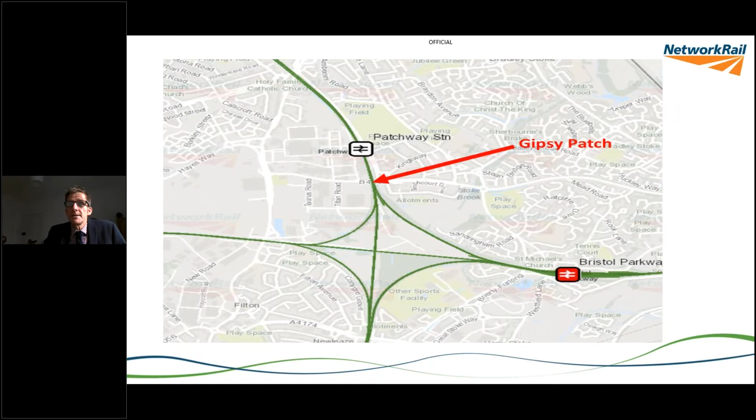So as I said in that earlier slide, this was made more complex because of what was actually on the structure as well. So the summary - if you read this it made me chuckle the other day.

I did make this slide myself. This made me chuckle because what it says is Gipsy Patch Lane in Little Stoke will be closed for almost 2 years for the removal of a railway bridge. Well, the important part was actually we were putting one back as well, because if we just removed it, obviously it might help the locals. And those of you who know this location will know that it is a little bit of a rat run for people who like taking shortcuts around Bristol.

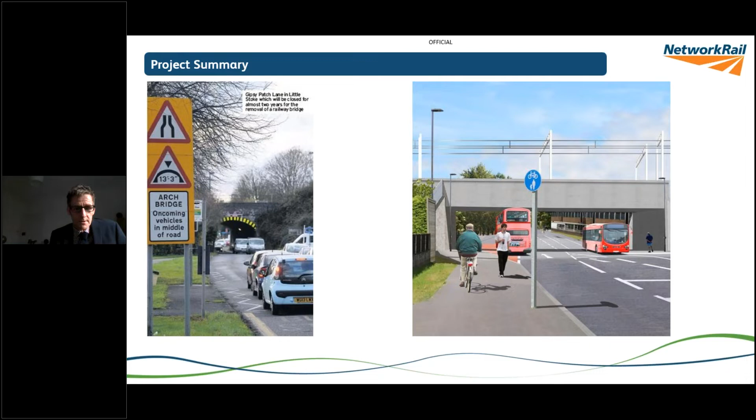But equally, it gets very, very congested, and that is the structure in the background you can see there that was being replaced. And this is an artist's impression of what you've kind of now nearly got. It's not quite there yet in terms of being fully open, but this is an artist's impression of what was going to be there in the future.

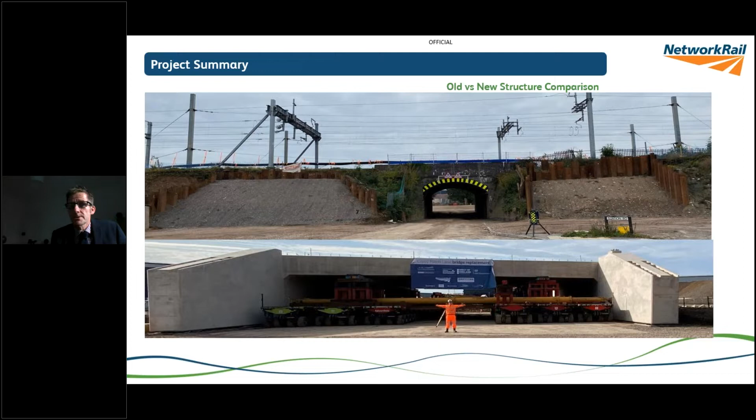And then that there is a picture to kind of put it into scale. Those two pictures have been scaled to size, and the one at the top is what was coming out, and the one at the bottom is what was going to be put in. And what you can see underneath the structure there, and I'll refer to these a fair bit through the presentation, is the SPMTs, which were the transporters that lift the bridge from its build location into its final location, which I can touch upon on this slide here.

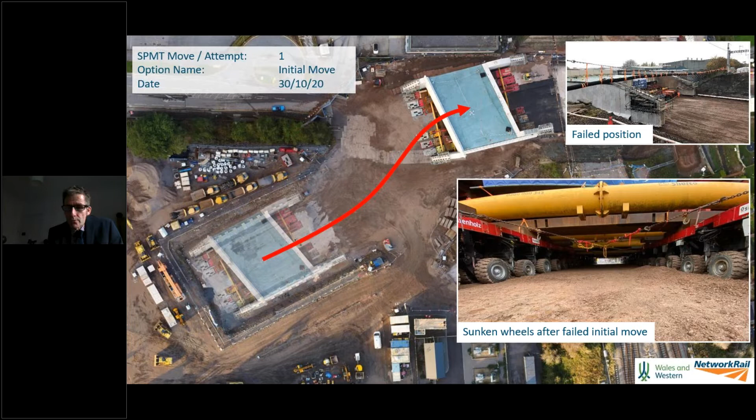As I said in the previous slide, the bridge had failed - it had sunk in the ground conditions. A short while before this bridge was moved, that whole area was underwater, and you can see some water there anyway, because the weather in November wasn't very pleasant. But a short while before this, the whole area was almost underwater as well.

It's probably one of the reasons why we ended up with the problems we did, because the ground water levels there proved to be problematic as the team were trying to move the structure. So there were many attempts.

I won't go through a lot of detail on this, but there were many attempts to move the structure. There were alternative methods which proved unsuccessful, like putting things underneath the wheels of the SPMTs to see if that would get the momentum going with the SPMT vehicles, but many failed attempts.

This was delaying the handback of the track, which was the ultimate target, because we couldn't hand back the track with the structure out of position - the track, OLE and signalling needed to be put back on the structure once it was in position. So there were many failed attempts to move the structure, but eventually the bridge did get moved into position.

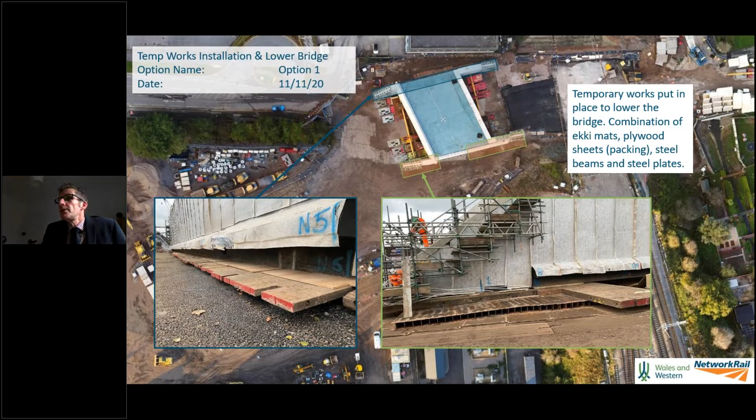Now, one of the issues around the structure was that, as you can see in the photograph on the left-hand side at the bottom of the slide, there was quite a significant issue with the buried services that were in the roadway, and that was a key factor in terms of how the roadway could be built and how those cables needed to be protected.

These weren't necessarily cables serving the railway - these were cables serving the industrial estate that this site sits within, including some quite key companies like Rolls-Royce, which we couldn't afford to damage. So there was a key piece of work in making sure those cables were protected when this structure was effectively driven over the top of them.

As you can imagine, the temporary works that were being suggested as temporary measures, shown in the previous slide, had to be really carefully designed over those cables, which is what you can see in some of these photographs.

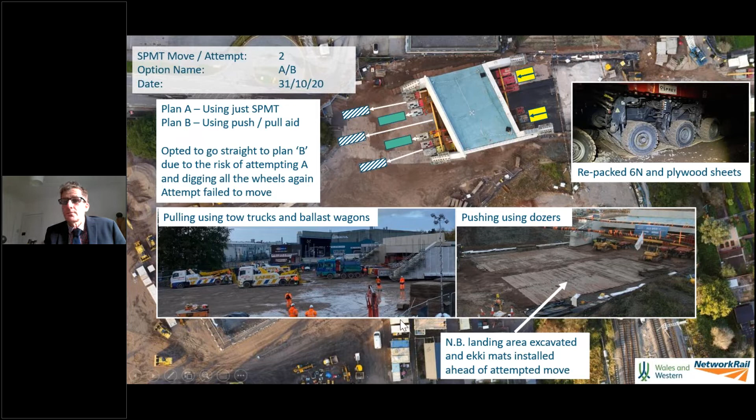So I'm going to move on from that. Eventually we had to get to a point where the structure was driven into position, and eventually got there by actually doing what should have been done in the design.

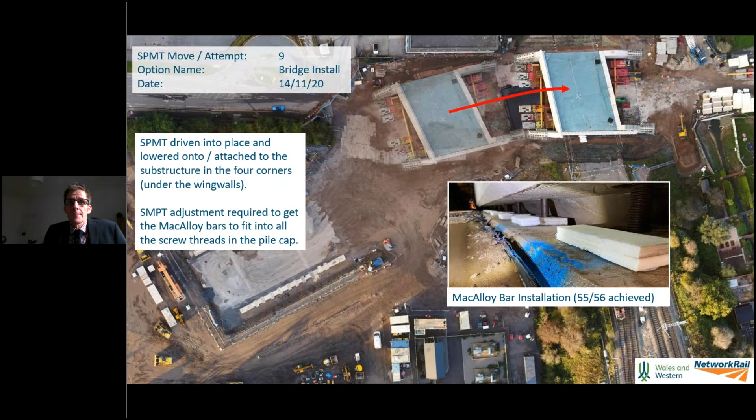So the key thing about the design and the roadway was that the design suggested there should be a tarmac roadway built, such that the SPMTs could drive over it. What you'll see through the next few slides is that tarmac roadway wasn't installed - a decision was taken not to install it, and it had a major detrimental impact on the program, which we'll come to.

So there was an investigation into the fact that this job overran by a few weeks, and there was a remit for the investigation. It was broken into 4 parts - one part was the development and design structures.

There was a small team of people set up to investigate whether we'd actually got the development design right. There was another team of people set up, of which some are on this call now, to talk about the management of the construction on site.

Another team was brought in to talk about the roles and responsibilities of the Network Rail engineer and project management team on site during the works, plus people like myself who were parachuted in. We think we're helping, but there's also a view that some of us brought in were perhaps a little bit of a hindrance, and just throwing resources at the job didn't necessarily always help. There was another team brought in to look at the crisis management and how we responded and recovered.

The key findings of the investigation are that the method of construction and design selected was correct for Gipsy Patch. It wasn't a first of type; these jobs are done a lot all over the country and the world, so it was deemed the correct method. There was a lot of experience in the team from both the contractor and Network Rail, who'd done many of these jobs before, but it was the heaviest SPMT bridge move in the UK at that point in time, significantly greater than anything the team had done before.

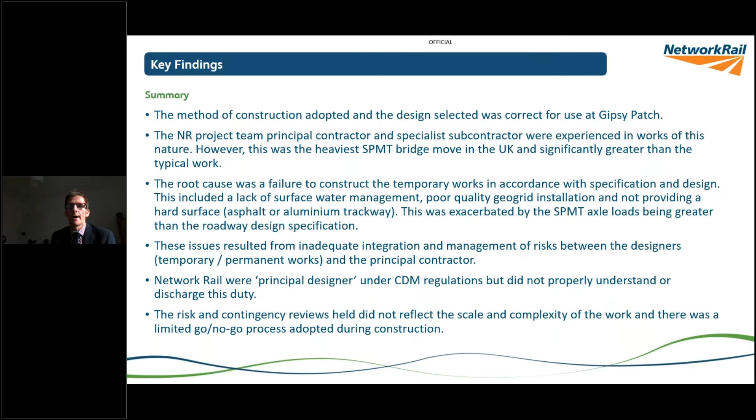That decision resulted in integration issues between designers and the management of risks between designers, because there was more than one designer, and the principal contractor on this job. Network Rail were the principal designer, and one of the findings through the investigation was that Network Rail hadn't fulfilled its duties under the CDM as principal designer, and certainly hadn't discharged all their roles and responsibilities. The risk and contingency pre-reviews, given the complexity of the job, looked quite a lot at the bridge itself, but didn't necessarily reflect how complex everything on top of the structure was, and the go/no-go process didn't really cover that.

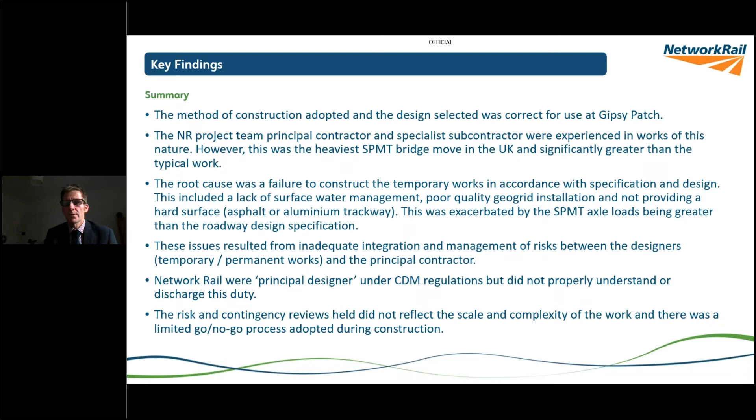So the engineering lessons learned: it was the correct single option. The fact that it was a reinforced concrete structure built on site was, as I said, the right thing to do. Lots of other options were considered, but this was the preferred single option, and the process followed for that option development was good. Yes, there were other options, but they were discounted. This slide really talks about the fact that the option selection process had been followed correctly. But the problem is the issues that caused the failure were that the design was not then followed.

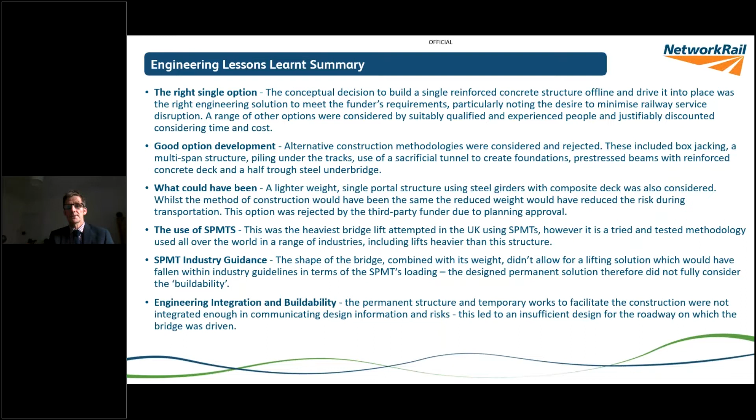I talked about SPMTs and the fact it was the heaviest bridge at that time. It was the heaviest, but it was proven technology, a proven method of working, and the industry guidance on the weight of the structure was followed, with our engineering team and design team involved in that decision. It was the right decision, and a lot of engineering integration and buildability work, particularly for the structure, had happened. But as I touched on earlier, there was definitely other work that could have been done in understanding how much more complex and detailed the work was. One thing I picked up on is how detailed the timings were for some of the tasks in the detailed plan.

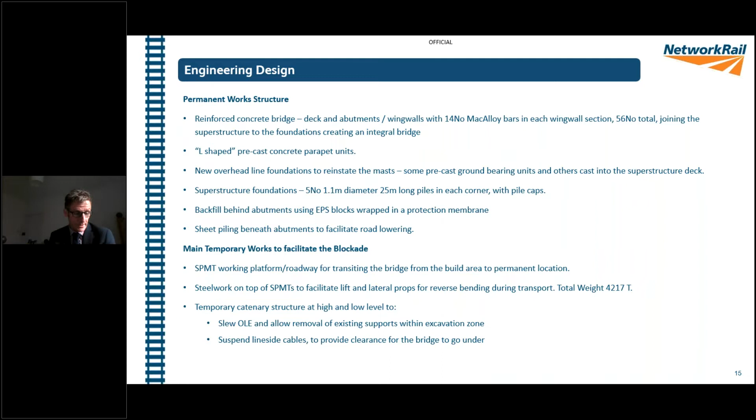I'm not going to cover everything on this slide as it'll take too long, but there were some things through the construction that, as I talked about with the complexity, may have been overlooked. The MacAlloy bars - that was almost precision technology to actually install that bridge with those MacAlloy bars. Having watched that actually being undertaken, you're talking millimeters.

This 5,000 ton structure had to be positioned within millimeters of its final position, because these MacAlloy bars were planned with absolute precision. And the L-shaped precast, I've got a photograph of these later on. It did cause us some problems.

Once the bridge structure was in place, the placement of these L-shaped parapet units caused us a few issues and delays through the extra work that had to happen on top.

The overhead line foundation caused us some concerns, and the interface with the suspended cables, which you'll see, the backfilling on top of the polystyrene blocks. That is an activity that I think should have been more meticulously planned in terms of how long each of those blocks would take, and how long the backfilling would take. Again, it needed military precision timing, because the amount of time it took to backfill certainly caused us some concern in the latter activities.

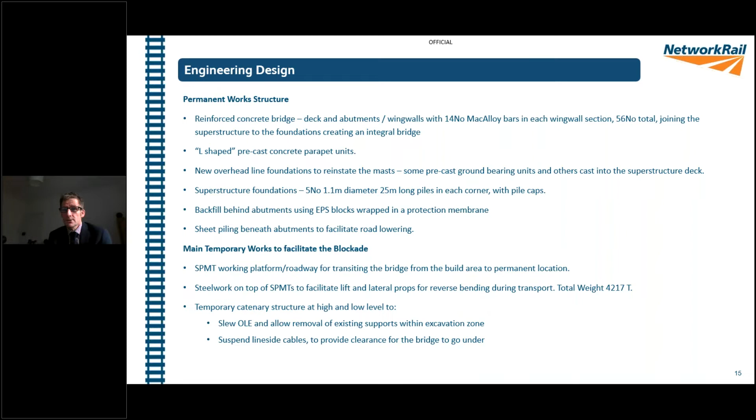Talked about the SPMTs a lot. Yes, there's probably nothing else for me to cover on that slide.

This slide, the only reason I've left it in was just to show, and I'll touch on this later, this area here is something we're going to talk about later. And this area here was backfilled to quite an extent, some with polystyrene blocks, and then the rest with motorway type fill. I'll come on to why on some later slides, a subjective topic, but I'd like to cover it because some on this call have more experience than I do in terms of positioning of P-way asset, and we'll come to one of those points later on.

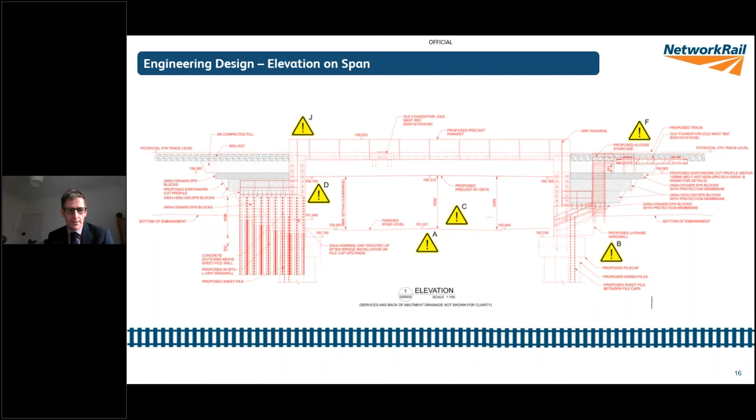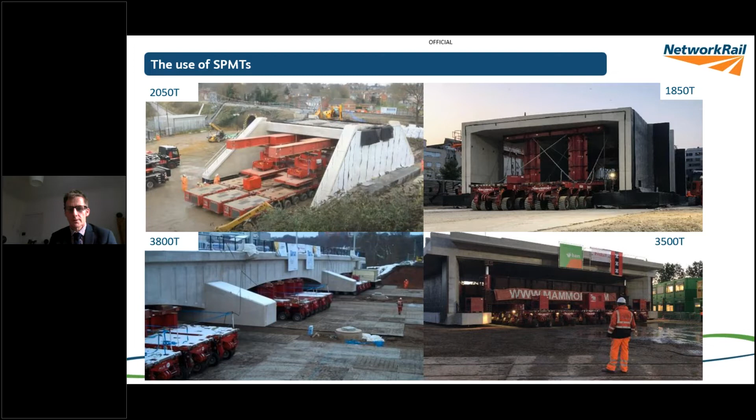So this just shows that yes, this has been done before. It wasn't a first of type. These are another company's SPMTs, but it just shows this wasn't the first of type. Some of those structures not quite as heavy as Gipsy Patch, but certainly getting up towards it, particularly that one on the bottom left, that's about 1,000 ton lighter. So it is lighter, but obviously the heavier the structure, the more SPMTs you need to move it. You can probably see they've got steel sheeting on some of that structure there, which is one of the features we'll talk about on the next slide.

And that, as I said, through the investigation that happened, was deemed to be the root cause of the issue. Now, what I said in my earlier slides, and it's probably not covered in these next slides, if this job had happened in the spring and there had been less water around, we will never know whether we would have got away with this or not.

Because if you tried to drive the SPMTs over the type 1 compacted fill that's not got a lot of water in it, we might have got away with it. Like if you try and drive your car over type 1 fill which isn't wet, we sometimes can get away with it. But if it's been raining for a couple of days and you try and drive your car over it, you might not get away with it.

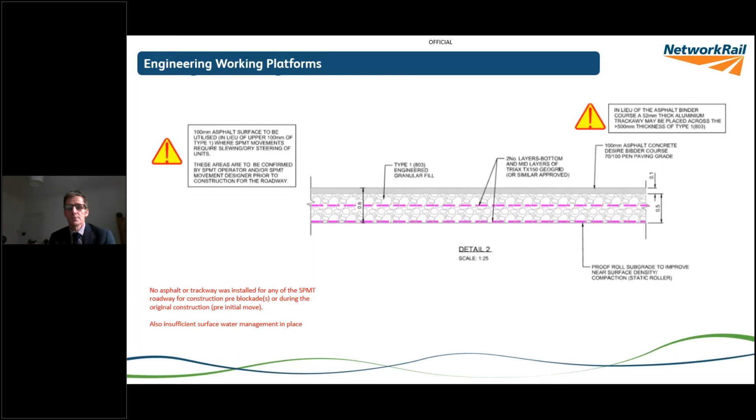So this is why I've left that slide in, just to show that that was the design.

So whilst the surface was kind of recently laid, the issue was that the material had the ingress of water, and it was having an impact on the wheels, and it was causing water to pond around the wheels.

Yeah, hence—oops, sorry, that's come onto my screen, sorry, I didn't mean for that to happen—hence it getting stuck.

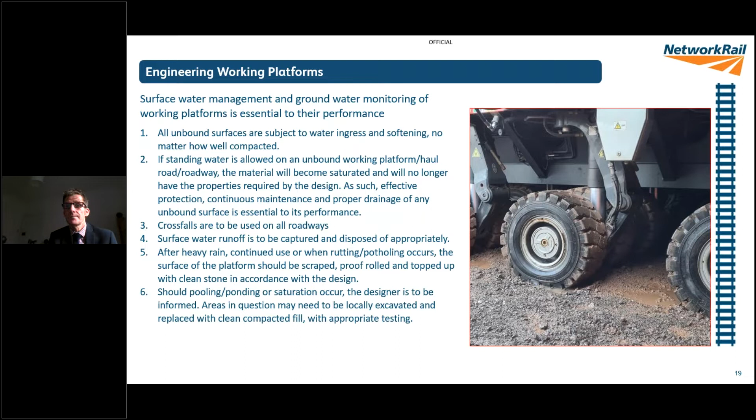So I've probably covered some of this stuff that I was going to talk about anyway. Yeah, I think I've covered everything that was in that slide.

So without any sheeting or any tarmac, you can see why. I guess you can see from that photograph anyway why it ended up getting stuck, and it ended up causing us to have a plan that was then under stress.

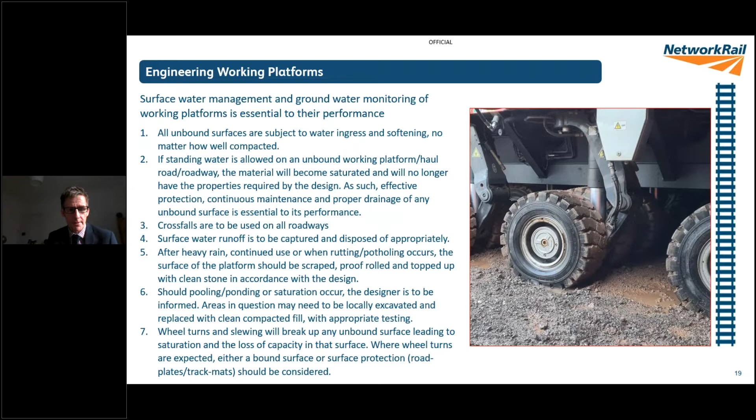But there were some issues which caused some more time delay in the setting out of those steps. So anyway, it ended up causing another load of trimming required, and whilst that was happening, we were on the critical path.

Once the structure was in position, we were absolutely on a critical path for backfilling. Then once the backfilling was complete, we were on a critical path with the installation of the bottom stone on the structure. And then for the OLE, signalling, and track work, we were absolutely on the critical path because we'd made a commitment to the operators in terms of this work going back into operation, such that our customers could then use it again.

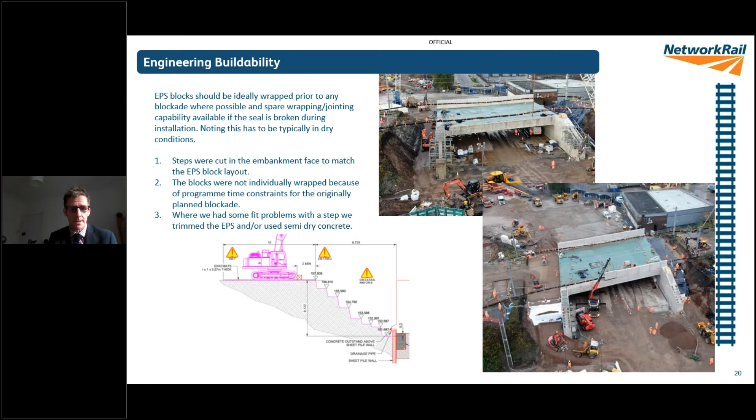I'm not going to cover all the things on this slide, other than - and you can feel free to read it when these slides are sent out - there were some decisions made, as I've talked about, which were not as per design. We talked about Network Rail not fulfilling their duties as principal designer, and we talked about the two things I've highlighted in red there.

The roadway was a potential single point of failure, and as we know, the roadway did then become that single point of failure, did end up failing, and was the one reason you could pick up as the fact that we overran by a couple of weeks.

As I've said a couple of times, we will never know if this work had happened as per the plan. If it wasn't for COVID, we might not even be talking about this on this call now, other than the positives about lifting a 5,000-ton bridge with the SPMTs and how successful it was, rather than talking about it because the job overran.

Again, through this, I'm not going to talk about this much - it's some of the detail in there I've highlighted in red. There is a suggestion that there was a commercial decision about not building the roadway, because the installation of the Type 1 fill was deemed to be acceptable, and not putting the tarmac surface on was deemed to be acceptable, but that ultimately proved to be the wrong decision.

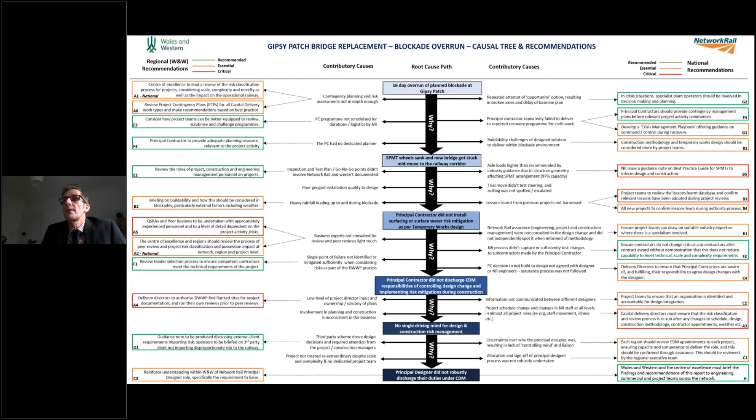So the recommendations that came out of this - now this is a very, very busy slide - but it's basically asking the five why questions. So why did we have a 16-day overrun? Because the SPMT wheels sank and the new bridge got stuck.

Why was that? Because the principal contractor did not install the surfacing or surface water mitigation as per the temporary works design. But why was that? Because the principal contractor didn't discharge their responsibilities by controlling this. Well, why was that?

Because there was no single driving mind in design and construction risk management. Why was that? Because the principal designer in Network Rail didn't robustly discharge their duties under CDM.

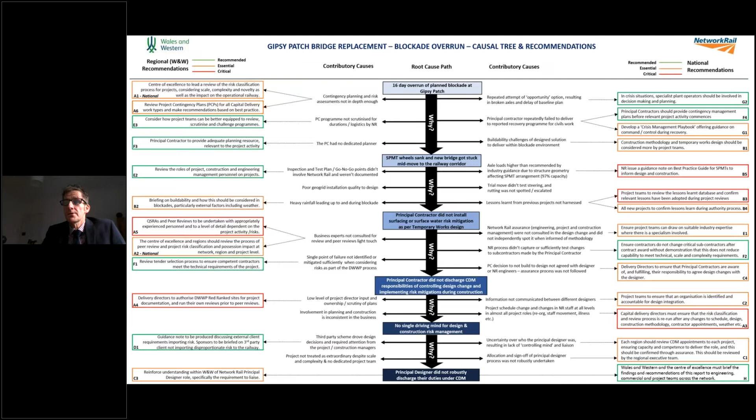This is a very useful slide. I'm not going to go through it in absolute detail because it's very busy, but it's very useful when talking about lessons learned. I'd recommend it being used for any job that goes wrong in future, because talking through this one slide today probably would have helped you understand what happened at Gipsy Patch Bridge. So a summary of the recommendations, I'm not going to read through all of these.

We talked about Network Rail needing to be better at risk assessment. We need to make sure we don't underestimate the complexity of everything else. Yes, it was a very big structure, but as a track specialist for 34 years, I could argue that wasn't as complex as everything else that had to happen, because it was just a big lump of concrete moved from one position to another, which had been done before. We need to make sure we're picking up the complexity of everything, not just the structure itself.

Talked about that in the second point actually - making sure the people appointed under CDM 2015 are actually capable and competent. This is not just about the principal designer, but about the role of the client, the principal contractor, and anybody else who fulfills another role under CDM.

Do I need to talk about anything else on that slide? There's a lot about competence and contingency management. Certainly the reviews that happened for this site focused a lot on moving the structure. It would be unfair to say it didn't focus on everything else, because there was obviously a plan for the signalling, the track, the OLE works as well.

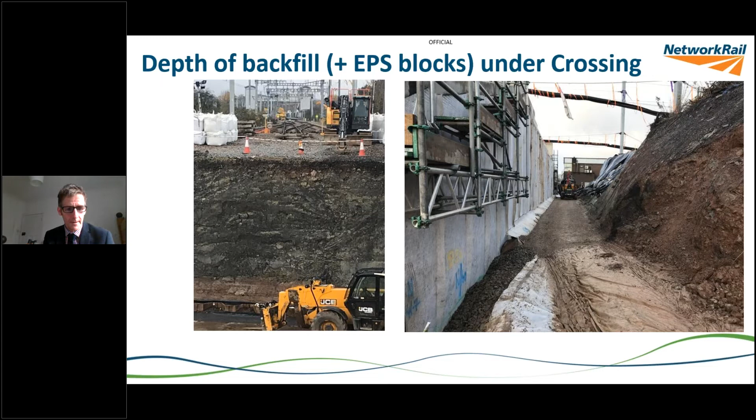I promise I'm getting towards the end of the slide. This was the other side of the structure, actually. This was the backfilling activity, and it was done in layers.

Again, to save time, through the progressive assurance, we were able to take some time out of the backfilling by increasing the depth of the layers that were backfilled. Because if we hadn't done that, we'd have overrun, since there were a few of us on site watching this activity happen, and we would have taken a lot more time.

If it was the right thing to do, and the testing that was happening at the time proved we had to continue, which I believe was 100mm layers, then we would have carried on doing 100mm layers. But we were able to reduce the amount of layers, reducing the amount of time, such that we could meet the critical path that was in place.

Thanks, Mick, for your comments on the additional comments you put. I didn't see what they were, but I see you've put a comment because I haven't read it yet.

So this was one of the additional complexities. You saw it in the previous slide, we were working around these cables. It wasn't a concern for most of the time because they were suspended up in the air and didn't really get in the way until we started moving the bridge into position.

There was a concern when the bridge was being moved into its final position with the location of these cables, and I know some of the Network Rail team on site had to ratchet the cables up further than they were initially ratcheted up because of structure concerns. The structure wasn't going to fit underneath.

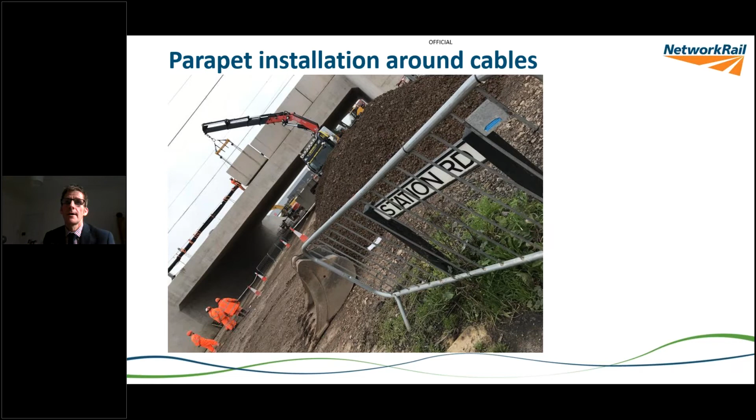The next photograph is one I took, which shows, again, it was probably a little bit of an oversight, because actually installing those L-shaped parapet units was quite difficult and took a lot of time. This was in effect on the critical path, because it had to happen in conjunction with the OLE works and the track works when we were really up against it in terms of time.

I may argue, in my subjective mind, why did our design need this? Because we were only removing a very, very small part of this layout. One of the things we ended up doing, as part of the mitigation for time, was working with the contractor and with one of the project engineers, who I got in independently and had worked with for many years, to get an independent view on whether we could get away with reducing the amount of tamping that was involved.

Obviously, we had to tamp the work that we'd taken out and reinstalled. But my concern was we didn't really have enough time to tamp the whole layout. My subjective view, which I'm happy to open up for conversation, is: why would we have been tamping that? Why couldn't we have designed it such that we didn't have to tamp into that whole layout?

I saw that Mark Smith is on the call, he may want to comment on that, or even Alex, who I know is also on the call. Those two individuals may want to add a comment. But equally, anyone else who wants to disagree with me that actually the right thing to do when taking one part of this junction out is to tamp the whole layout can do so. I've got an argument that says if it ain't broke, don't fix it. But equally, we could correct some wrongs by perhaps designing through the whole layout as well.

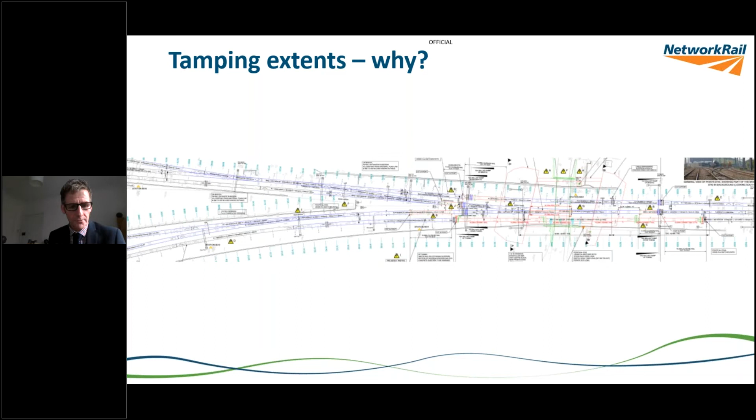And then the other subjective point, I've got to be fair on this one, I was really, really worried. I was concerned. I didn't know anything about this job until the day I was asked to come and have a look at it.

Immediately I start asking questions. Immediately I find out it's modular S&C on top of a structure. We've got OLE structures to put in as well, we've got suspended cables. It's a pretty complex job. My immediate concern when I was told we've got a second tier P-way contractor on this was, of course, concern.

But what I will say is that the individuals employed by the second tier contractor here, KGJ Price, had a lot of experience in installing modular S&C, whether by chance or not. We could have ended up with a second tier contractor that wasn't experienced in installing modular S&C or in complex S&C renewals.

So Mark and Neil from KGJ Price did a fantastic job, not only replanning it once, but probably about half a dozen times because the bridge kept getting stuck. The bridge, what I didn't say earlier, we moved it one way, then had to move it back, then move it again. Because of that, we had to keep replanning the work and keep finding time from somewhere.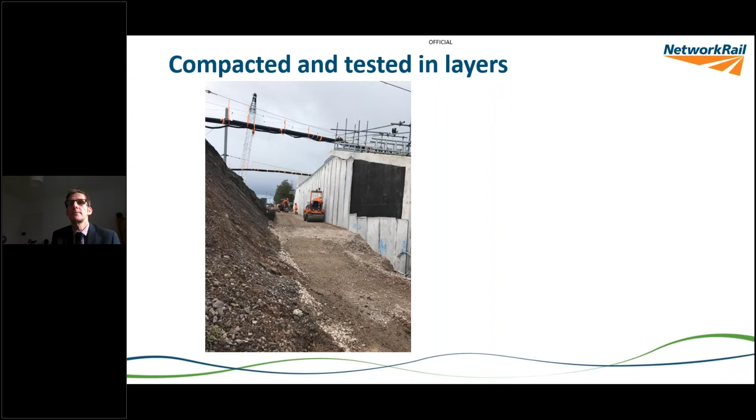So one of the conversations I was hoping to have here, because I've almost finished presenting now, was that considered? Is it a concern? Is it me just being over concerned? So these things I've put on there as the four points. It's kind of the third and fourth points, because we are a track community here, most of us, is that - am I right to be concerned? Am I not? Am I over concerned? And Gilles, I guess that's where I kind of wanted to open up after I've made my last point about safety.

I'll be very, very high level here, and I'm quite proud of this actually. For those of us who work in the railway industry on track, I'm quite proud of how safe we are. All I'll say from a high level is that what I saw in the highways environment, which is perhaps where this principal contractor is used to working, what I saw was different. I won't say any more than that, because it would be unfair of me to say more. But the fact is I'm really, really proud of what we do in the railway community in terms of safety. We're still not perfect, I absolutely know that, but I'm proud of how we do it. I'd say the highways environment perhaps has some things to learn from us, particularly in communication between machine and machine controller on the ground. I'll leave it there, because again it could be me being very subjective, but there's certainly a lot to learn, I think, from highways to railway environment.

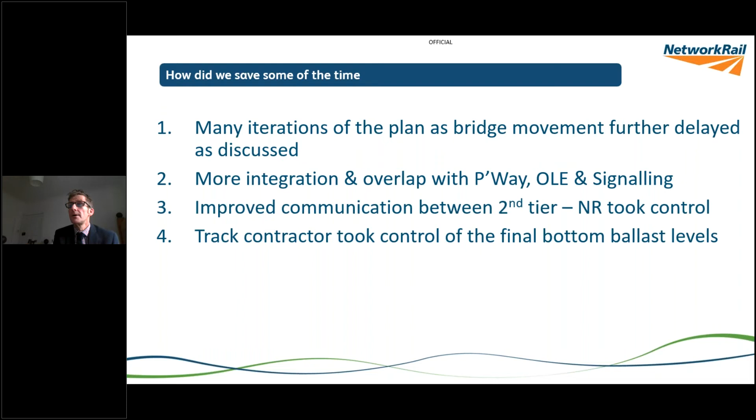So Gilles, I think that's almost my presentation done, because I've touched on some of this already, and I'm happy to take questions or maybe get some views from the experienced audience we've got here about some of those things I talked about. I'd also be happy to hear from the likes of Mark and Alex and others who were involved, and maybe challenge me on some of the things I've said. So presentation done, Gilles, and I'm happy to unshare my screen now.